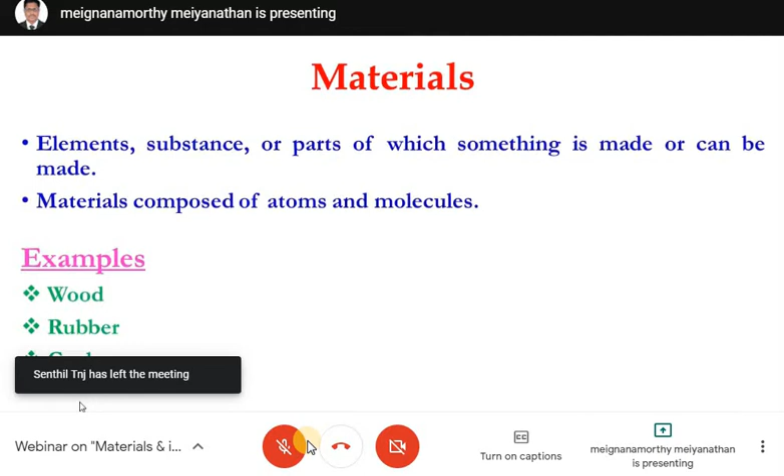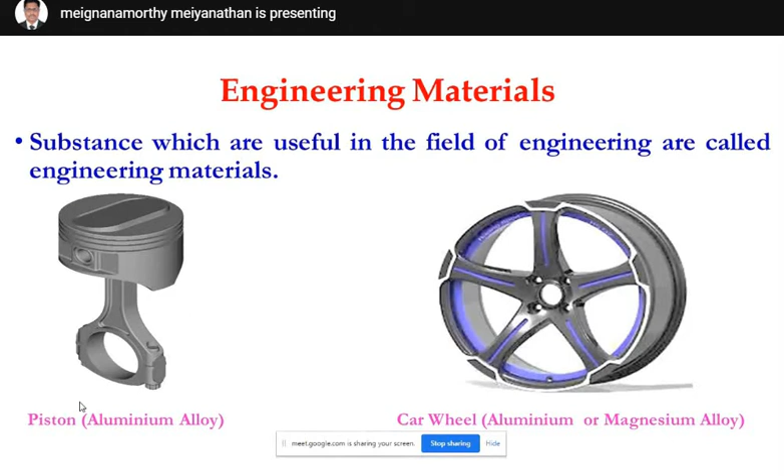So next one, engineering materials. Substances which are useful in the field of engineering are called engineering materials. It might be a wood, a plastic, a metal, a ceramic, or a composite material. If a substance is used in the field of engineering, that is generally called an engineering material. I have mentioned 2 applications here for your better understanding.

So consider this as a piston. This piston is made up of aluminum alloy 2024 or 6003. This is the best example relevant to our mechanical field. Next one, car wheel. Nowadays car wheels are made up of magnesium alloys or aluminum alloy. Depending upon the weight of the car, any one of the materials can be selected. So these kinds of materials are playing a vital role in the automobile, mechanical, electrical, and electronics fields.

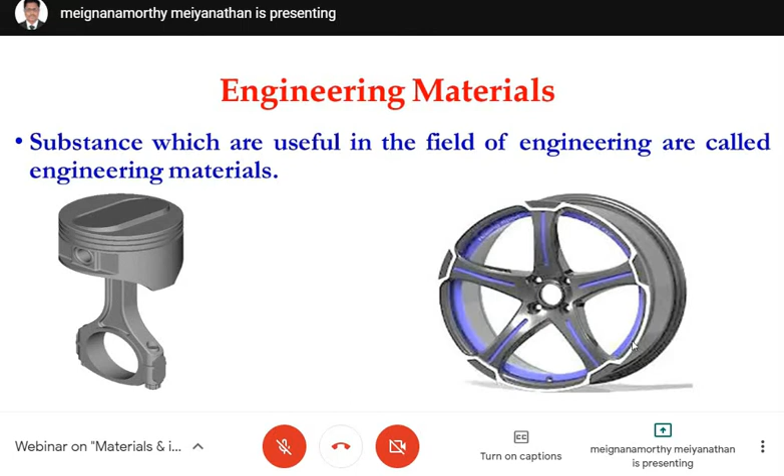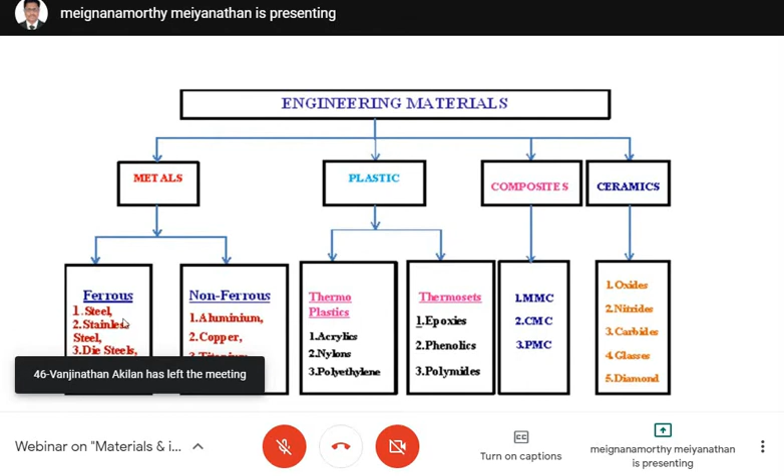So the major classifications of engineering materials. Majorly, materials can be classified into 4 categories: first metals, second plastics, third ceramics, and fourth composites. Metals can be further subdivided into 2 categories, ferrous and non-ferrous metals. Ferrous can be classified into steel, stainless steel, die steel, and cast iron. Non-ferrous metals can be classified into aluminum, copper, titanium, zinc, magnesium, and manganese.

And plastic can be classified into 2 major categories: thermoplastics and thermosetting plastics. Thermoplastics can be classified into 3 categories: acrylics, nylons, and polyethylene. Thermosetting plastics can be classified into 3 categories: epoxides, phenolics, and polyimides. Ceramics can be classified into 5 major categories: oxides, nitrides, carbides, glasses, and diamonds. Composites are classified into three categories: metal matrix composites, ceramic matrix composites, and polymer matrix composites. So these are the major classifications of engineering materials.

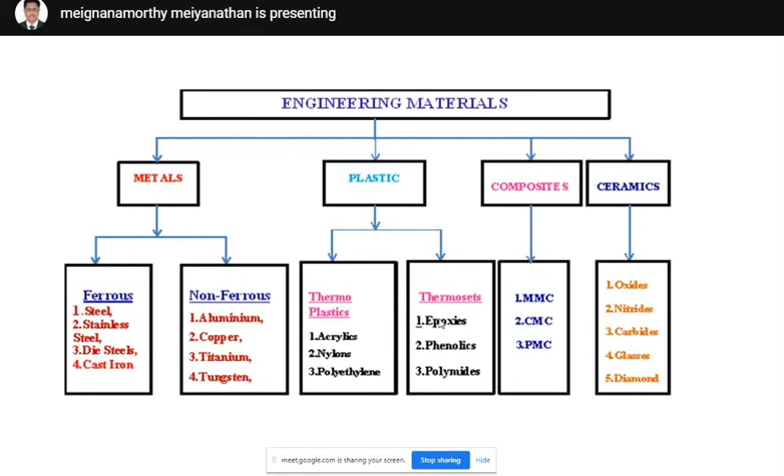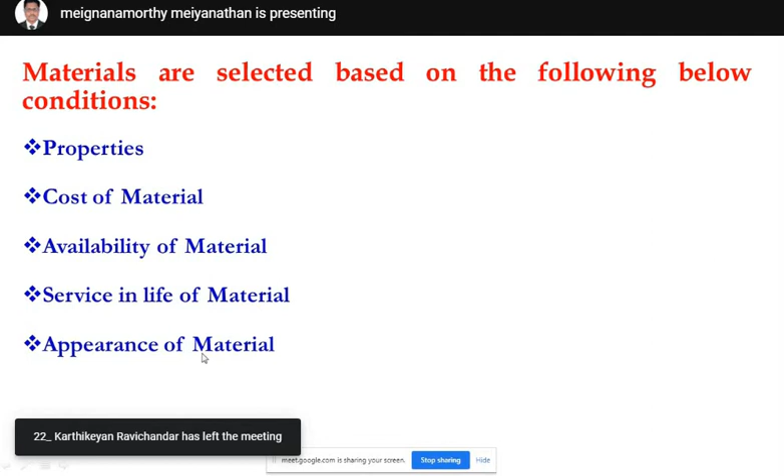Depending upon the application of the component, the material should be selected. So what are the factors to be considered while selecting the material? First one, properties. Next one, cost of material. Third one, availability of material. Fourth one, service lifetime of material. And next one, appearance of material. So based on these factors, the material should be selected.

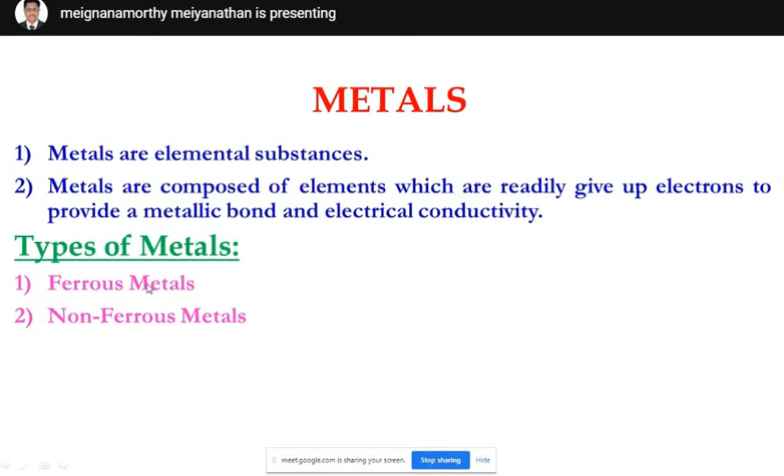So next one, basic definition for metal. Metals are elemental substances. Metals are composed of elements which readily give up electrons to provide a metallic bond and electric conductivity. So metal is a kind of material. It is a traditional material which is being used in most of the engineering industries. Metals can be classified into two major categories: ferrous metal and non-ferrous metal.

So first one, ferrous metal. The metals which contain iron as their main constituent are called ferrous metals. Just to take an example of steel, in that steel, iron and carbon play a vital role. Among the two materials, iron plays the vital role. So the metal which contains iron as its major constituent is called a ferrous metal. Non-ferrous metals are the metals which contain a metal other than iron as their main constituent.

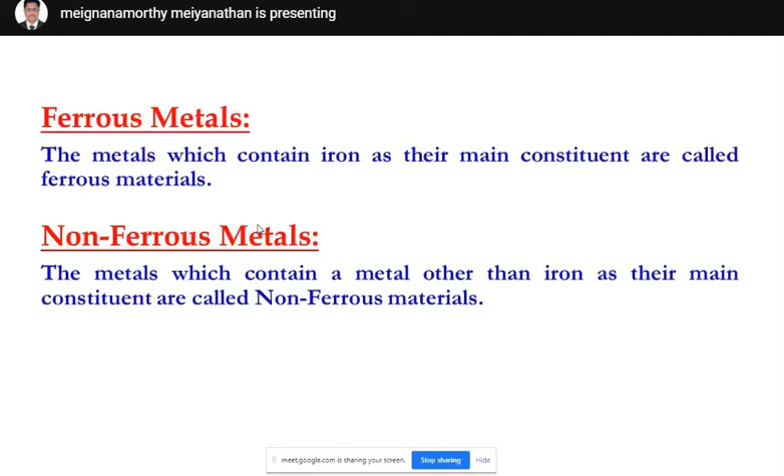For example, for ferrous metal, take steel or cast iron, and for non-ferrous metal, aluminum, magnesium, copper, zinc. So these are the examples for non-ferrous metal. If iron occupies a major portion in a metal, that is called ferrous metal. Simultaneously, if iron occupies a minor portion compared to other metals, that is called non-ferrous metal. So these are the basic definitions for ferrous as well as non-ferrous metals.

So basic characteristics of ferrous metal. Ferrous metal is much harder and stronger, it has better rigidity, formability, machinability, weldability, and better conductivity. Conductivity means electrical conductivity and thermal conductivity. So these are the conductivity properties the ferrous metals can exhibit. So these are the basic characteristics of ferrous metals.

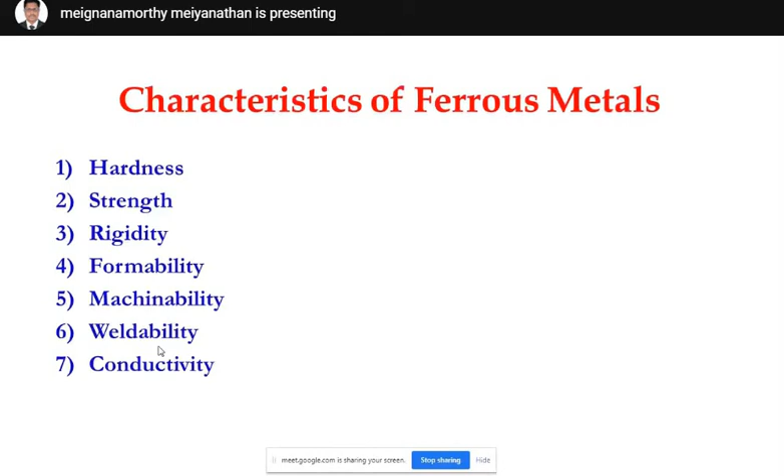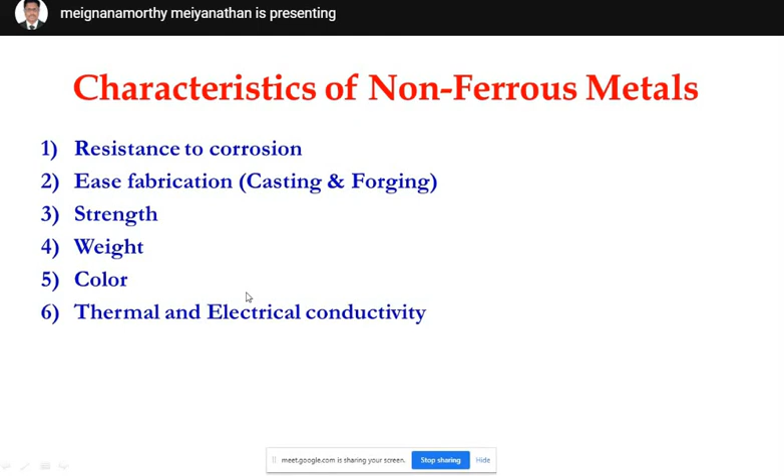So next one, characteristics of non-ferrous metals. Better resistance to corrosion. It has the properties to resist corrosion, and easy fabrication. Casting and forging can be done easily when compared with ferrous metal. Non-ferrous metals are also much stronger and have less density. The appearance of the non-ferrous metal could be much better when compared to the ferrous metal, and it also has the capability to possess better thermal and electrical conductivity. So these are the basic characteristics of non-ferrous metal.

Next one, ferrous metal. Steel comes under the category of ferrous metal. Steel plays a vital role in all the engineering industries, especially in the mechanical, civil, as well as electrical industries. Steel is an alloy of iron and carbon, which contains carbon up to a maximum of 1.5 weight percentage. So steel is a combination of iron and carbon. It contains carbon up to a limit of 1.5 weight percentage.

However, steel also contains some alloying elements like silicon, manganese, sulfur, phosphorus, and nickel. So these are the alloying elements. Iron and carbon occupy a major weight percentage in the steel. Steel is made by two processes: one is from iron made in blast furnaces, and one by recycling scrap steel in an arc furnace.

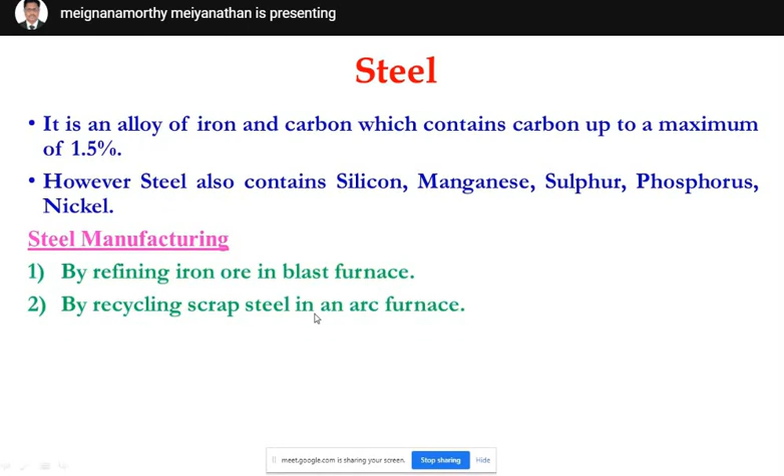Sir, is it audible? Sir? Yes, sir. Audible, sir. Okay, thank you.

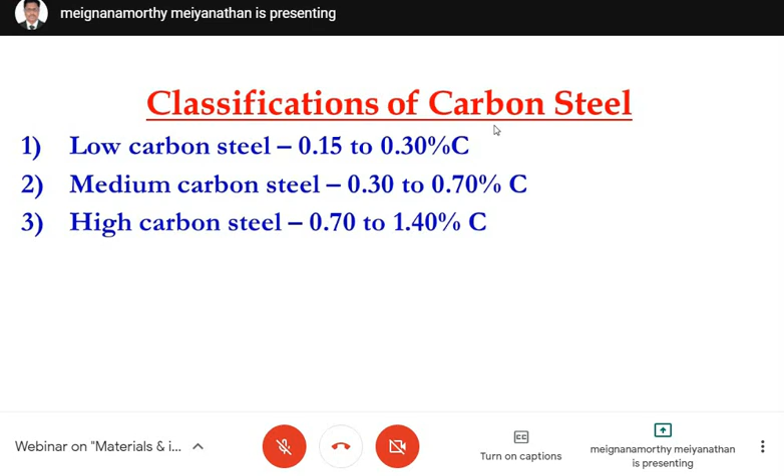So next one, classifications of carbon steel. Carbon steel can be classified into three major categories. First one, low carbon steel. Second one, medium carbon steel, and the third one, high carbon steel. Based on the weight percentage of carbon, the steel has been categorized into these three categories. If the carbon content in a steel is between 0.15 to 0.3%, that is called low carbon steel. If the carbon content is between 0.3 to 0.7%, that is called medium carbon steel. If the carbon weight percentage is in the range of 0.7 to 1.4%, that is called high carbon steel.